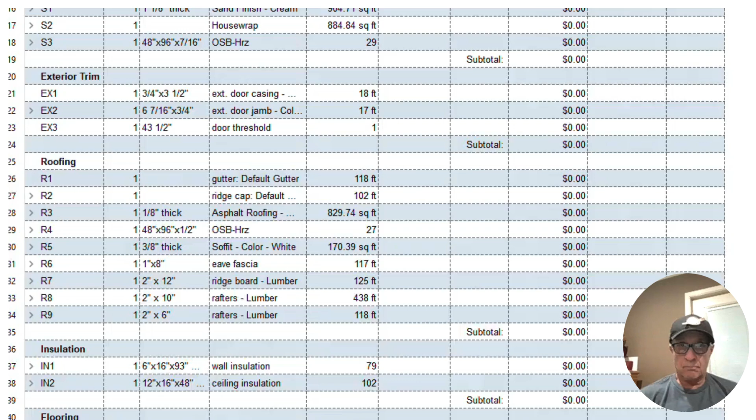This is part two of doing takeoffs. I want to show you how we do the takeoffs once we get the design done. If you haven't seen part one, go back to part one on takeoffs and we'll show you how to do a design and get a plan for the 600 square foot ADU.

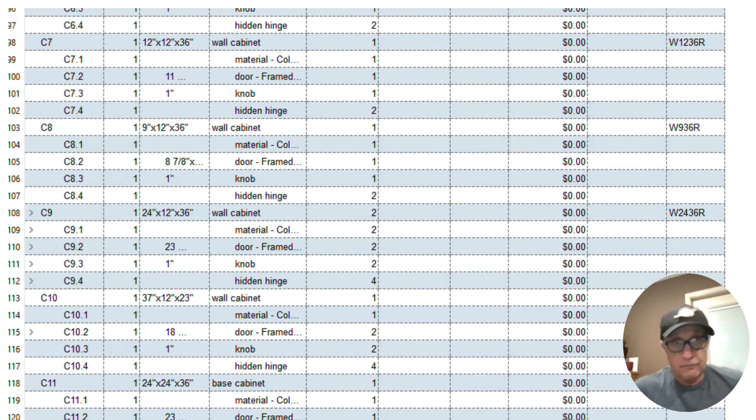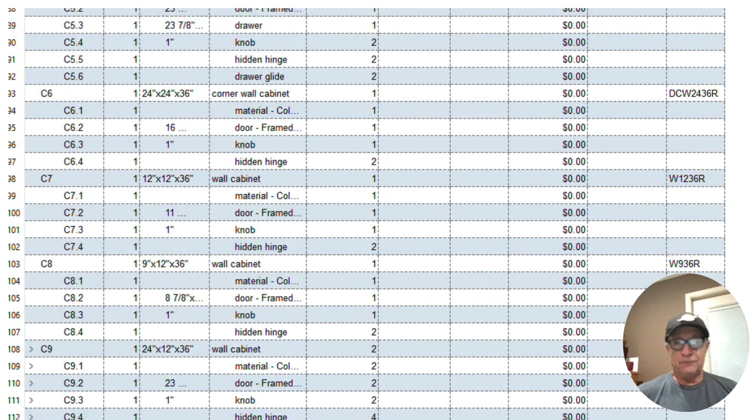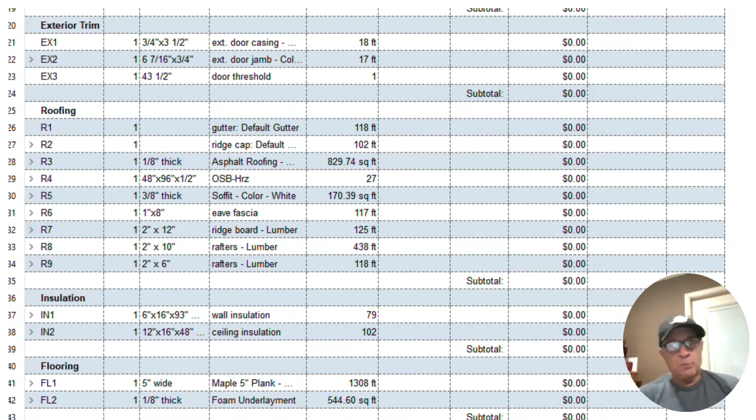One of the things I'm showing you here in front is the actual takeoff that the program Chief Architect Home Designer Suite has, their own material takeoff. It's very, very detailed, more than I want to use. I do my own takeoffs. They've even got down to the hinges on your cabinet. And I don't think you're going to need that, unless you're a cabinet maker and you want to count your hinges. I'd rather just buy the cabinets with the hinges on there.

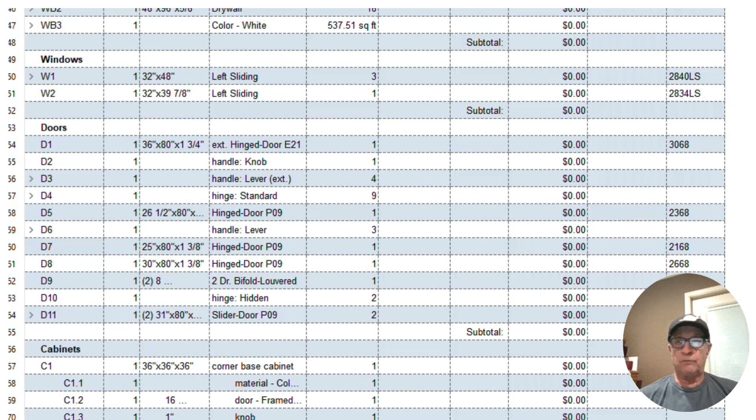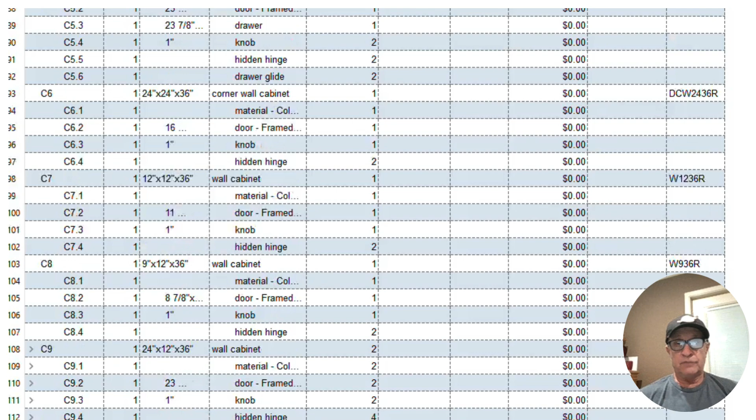But that's one of the things that I wanted to show you till we get on to the next one, which is going to be the design that I did for the ADU. And I'm going to show you what the takeoffs I did off of there. I took the liberty of doing a takeoff on it already, just to show you the perimeter walls were 100 lineal feet. That's 20 feet plus 30 feet plus 20 plus 30. Very simple. That's going to give you your framing, at least for the exterior, the stucco for the exterior, the drywall for the inside of the perimeter walls.

Also, it'll give you the paint as well as the drywall, and then you got to count the interior framing also to get the rest of it. But what I've done is I've gone through the perimeter walls 100 lineal feet, the interior walls is 60 lineal feet, and of course, because this is an 8-foot ceiling, you got to multiply by 8. I've got the floor area, which is a 600 square foot ADU. Ceiling area is the same.

The wall area is actually 220 lineal feet, with the wall square footage is 1760. Cabinets are 20 lineal feet. Exterior walls are 1,000 square feet. We always count the exterior walls, which is 100 times the height is 10 feet. So I took the liberty of doing the takeoffs and I put it on there for you.

You can measure yourself. We're going to go ahead and watch the video on how I do the takeoffs with the takeoff sheet.

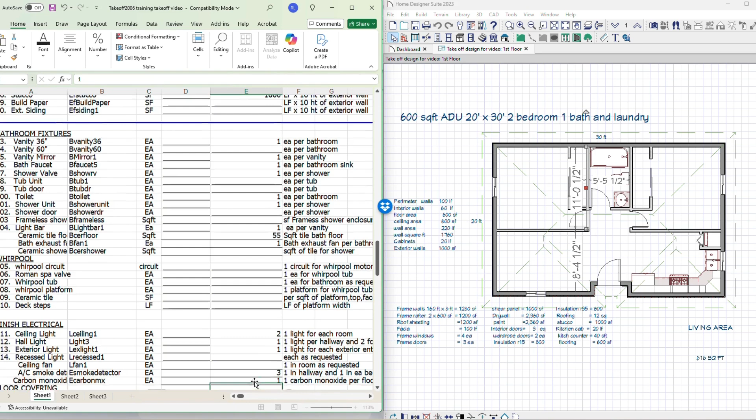I've got 2 lights, one light for each room, 1 for each bedroom. Then I have a hall light. I also have recess lighting. I've put 1 in for each, and then 1 exterior light. Oh, I didn't put in recess. That's right. I didn't count that in there.

I've got 3 smoke detectors, 1 for each bedroom. I did that twice. I have it further up on my takeoff sheets. I got to correct that because I've already counted that in there. And then I've got 1 carbon monoxide. That's required by code now. Floor coverings, I included 550, which is 600 minus what I counted for the tile.

So now we're getting into the kitchen, the final ones for the kitchen. We got 20 lineal feet of cabinets. Primarily what I do is I'm trying to get them a price and I give them an allowance. So if I figure they're worth 5,000 or 8,000, that's what I'm going to give them on there. Countertop, I put 30 lineal feet of countertop, one kitchen faucet, one kitchen sink, one range hood, one disposal. Now we're done with the kitchen takeoff.

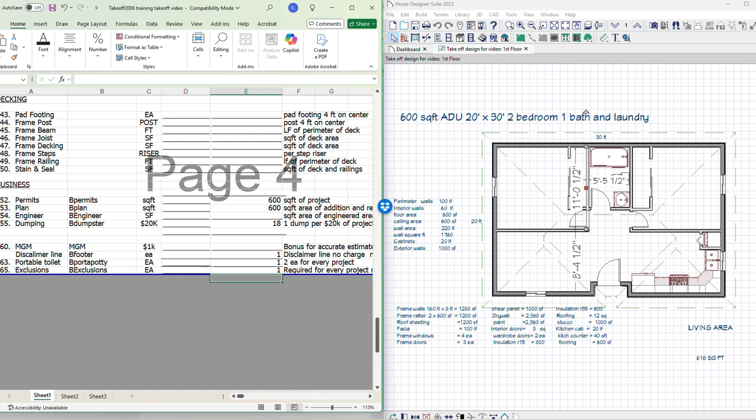So the last thing we're going to do is permits, plan, engineering, and dumping. So my calculation based on my app is I put 600 square feet for the project and it'll calculate an approximate amount of permits. But that's an allowance. So my customer knows if it goes over that, they have to pay the difference. Now you can set that up in the Easy Estimator app to show that on the detail line saying your allowance is this amount. Anything above they would pay.

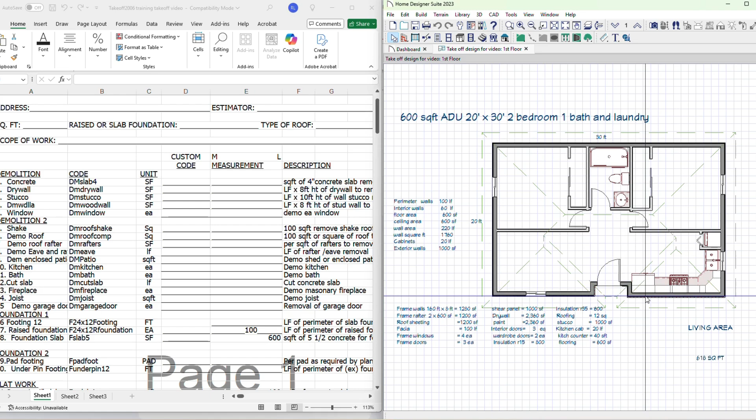I've also got 18 dumpsters in there. For every $10,000 I count a dumpster, and then I charge maybe a little bit less than that. So this job is probably about a $220,000 job. So instead of 22 dumpsters, I just charged 18. So that's primarily how we do the takeoff.

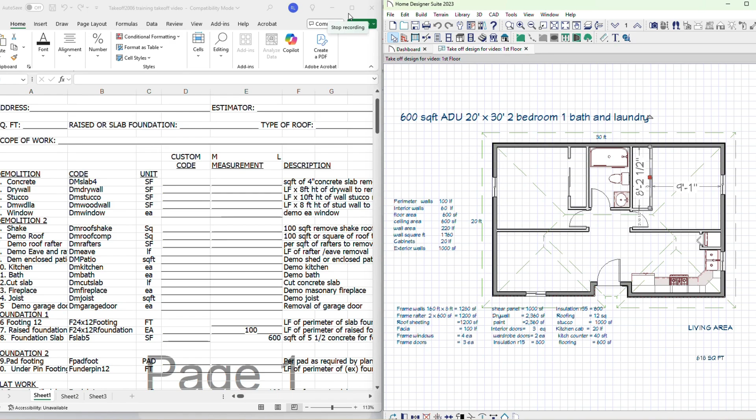Now that you have your takeoff sheet, we're going to go to the third part of the video and we're going to show you how to input it into the Easy Estimator app so you have a complete price. With the first video, which was about 15 minutes, the second video, which is probably about 15 minutes, and the third video, which may be about 45 minutes, you can have a complete bid for an ADU.

And you don't need to take days. You don't need to sign a contract just for plans. You can go ahead and bid it and try to sign the contract for the whole ADU, the whole 225,000 or whatever it comes out to be. You don't have to try to sign a $10,000 contract for plans when you can get the whole piece of pie.